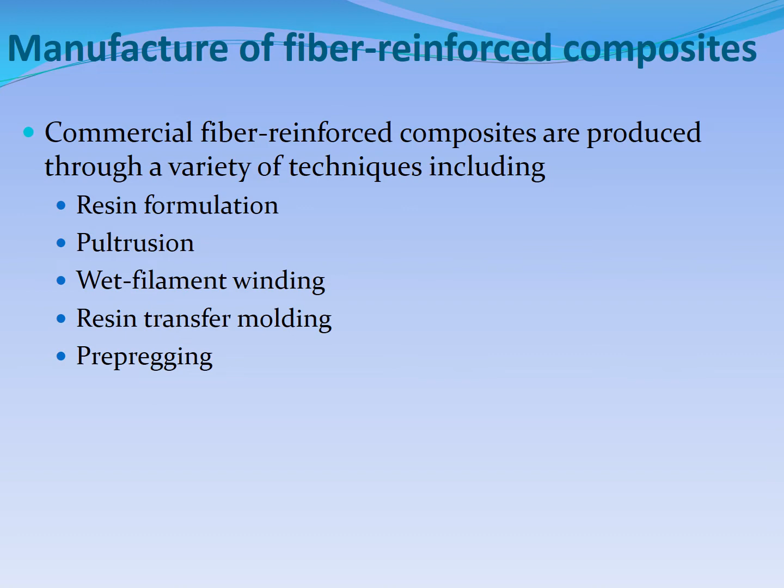Remember, this is a course in advanced materials, right? There is another course in manufacturing, but I keep on trying to show, to a very small extent at least, how these modern materials are manufactured. A little bit. So very quickly,

resin formulation, right? Simplest production strategy: bits of chopped fiber are poured or blown into the matrix material, often already in the desired mold, the shape that we want the final composite to be in. Curing agents, accelerators, dilutants, fillers, and pigments are added as well.

If the matrix is a polymer, then material is melted prior to addition of other ingredients and then poured into the mold. If epoxy resin is the matrix, then it is mixed with a hardener also. The matrix material hardens into the shape of the mold.

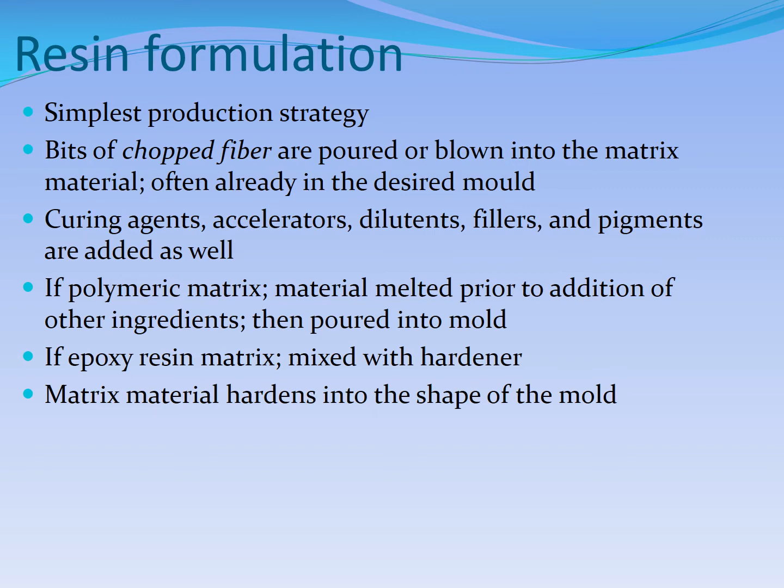Pultrusion. Uniaxial composites are often made through pultrusion. The previous one was chopped. A large number of single strands are wound in parallel to form a roving. Look at this schematic diagram. Many rovings are connected into a device called a creel that lets fibers be pulled together. So this creel is like a spool, right?

Fibers are pulled continuously from the creel through a tensioning device and into a bath where they are coated with a matrix material. So from here to here, and impregnated in a bath. Coated fibers are pulled through a heated die for curing. So after the impregnation in the bath, they are being cured in the die.

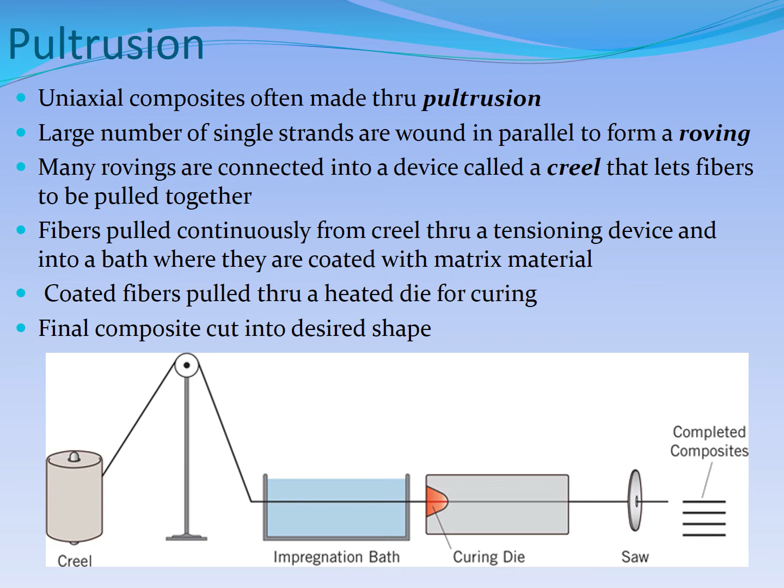And the final composite is cut into the desired shape. So this is like a thread and there is a saw. So completed composites of certain lengths and so on, or they could be wound again and so forth, right? So this is pultrusion. You are making a composite, right? Because in the bath you have the matrix or the resin and so on, and then it is coated and then you are doing it.

So this is pultrusion. Wet filament winding. For more complicated shapes, like if you see weaving is being done. So continuous fibers from rovings are pulled through a resin impregnation bath, then wound into the desired shape. So 1, 2, 3, right? Because they are being impregnated, and then one of them is going in one direction, the other one is going in the other direction, and you are doing a weaving. So this is just a schematic, but the real thing will be pulling it through different directions and a winder.

When enough wet filaments are wound around the part, it is taken into a curing oven to complete a composite of the desired shape, right? So you are doing the same thing as you were doing in pultrusion, but you are doing it from multiple rovings, and then in the end you are winding them in a particular weaving pattern. This weaving pattern could be straight horizontal, straight vertical, diagonally across, or whatever. And once this part is done, then you take the whole thing into the furnace for curing and so on.

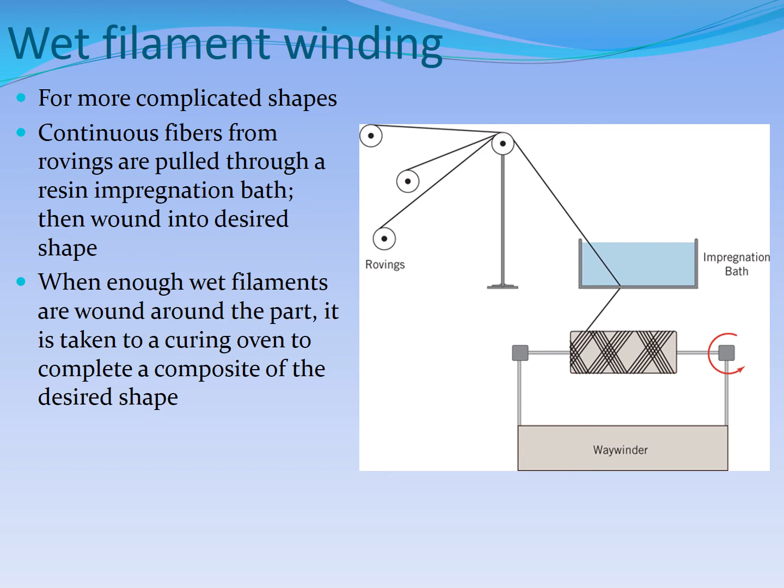Resin transfer molding. Process of converting mats or weaves into composites. You have made some mats, you have made some weaves, and then you are combining them, right? So woven fiber mats are placed into a space between the top and bottom mold. Top mold, bottom mold. Resin is injected through the top cavity under sufficient pressure to ensure that it penetrates and surrounds the mat, right? Injection channel, and this is the mat.

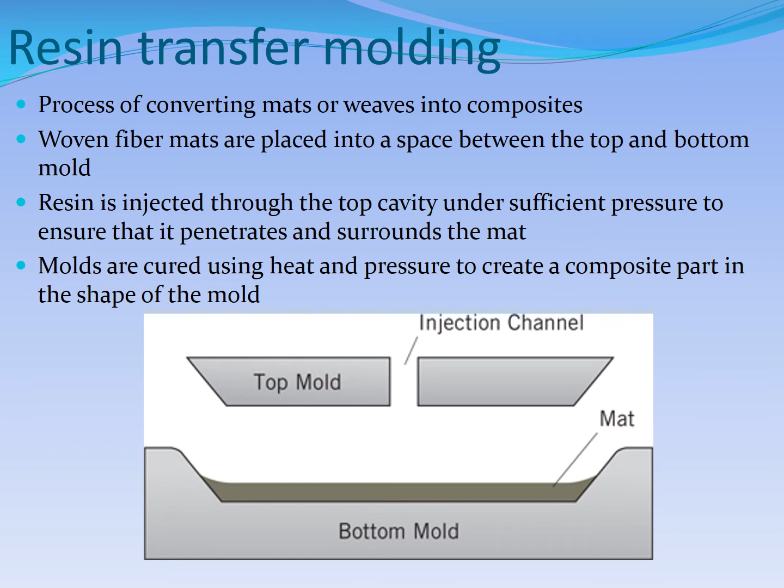Molds are cured using heat and pressure to create a composite part in the shape of the mold. So there is the top mold, there is the bottom mold, there is the injection, and you have the resin in between, and so on. So you have already done the weaving in a standard grid pattern or in a diagonal pattern or whatever, and then you are using those woven mats above and below and so on, and then you are generating any number of plies and so forth.

Pre-pregging. In the previous methods, coating a fiber with matrix was immediately prior to manufacturing the composite part. It can be advantageous to convert fiber bundles already impregnated with matrix material to the composite without further processing. Fibers are passed through an impregnation bath that coats them with small quantities of resin. They are then passed through a furnace and heated slightly to ensure that the resin sticks to the fiber.

The resulting pre-coated fiber, which is called pre-preg, is stored under refrigeration until it is ready to be formed into the composites. Pre-preg is generally woven into the desired mat, trimmed and placed into the mold. Often several layers are required for the desired thickness. The mold is placed in a vacuum bag, then cured in an autoclave and subjected to pressure and heat.

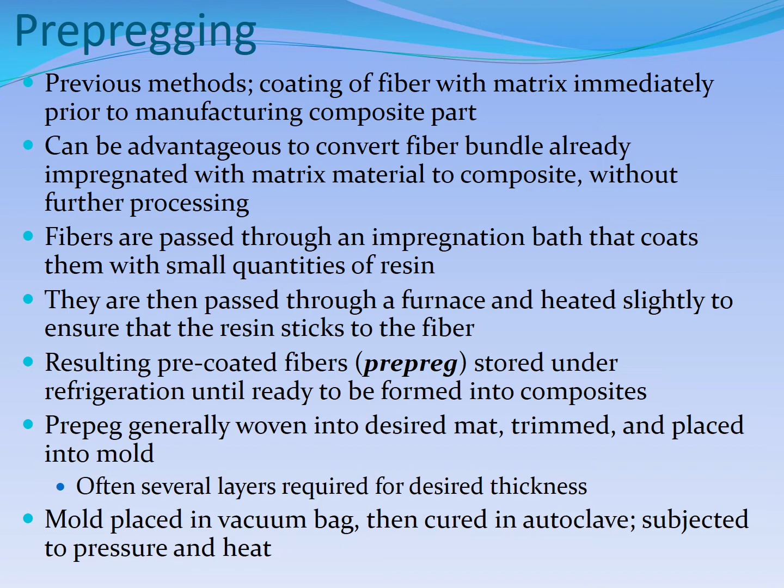So this is a little more advanced combination of the previous methods. Here you are seeing that the fiber spool is there, then they are impregnated in the bath, then they are going into the furnace, then after the furnace, when it is cured, they are doing the pre-pregging, and then the wind-up spool is there in the final one. So this is the pre-pregging process. I am not going into a lot of detail. We are showing this to you only in a schematic manner.

And as I said, unless you join a factory where composites are actually being made, you know just a little. But for example, we have in Sohar CPI, Composite Pipe Industries. There is another composite manufacturing plant in Rusayl. These are big ones, where if you do a job, you will very quickly see that the matrix material is this type of resin or polymer, and the fiber material is this type of glass or carbon, and the way you are doing this winding.

For example, CPI is Composite Pipe Industry. After pre-pregging, they are already winding the whole thing in the shape of a pipe. Maybe it is a 6-meter pipe being made. And once it is woven, the whole pipe will be cured somewhere. So you will actually see it. These are large ones, but small composite factories are there in Mabela.

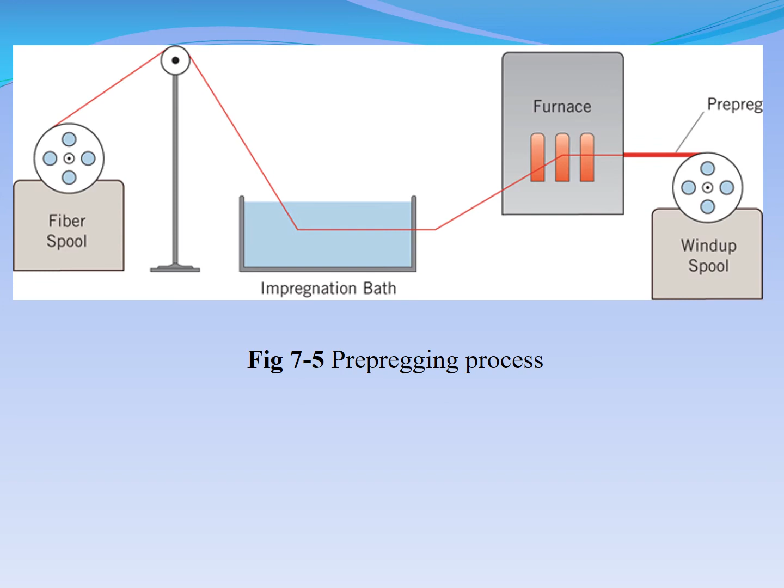Selection of reinforcing fibers. The most important properties to be considered in reinforcing fiber selection are specific strength, cost and the ability to bond with the matrix. Until now, we were using the strength, the density, and the Young's modulus. Specific strength was there in the tables, but we were not using it. Now we are telling you that specific strength is very critical. Specific strength is tensile strength divided by density.

So it is an indicator of the strength to weight ratio, because this is the most important thing, strength to weight ratio. We don't want a very high strength if the total mass or total weight of the composite will be very high. We don't want that. In any engineering, we don't want a very heavy object. So strength to weight ratio is the specific strength. In table 7-2, key properties are there, and a specific strength is also there.

Ceramic fibers, silicon carbide, aluminum oxide, etc., tend to be strong and stiff but dense, right? So their strength is very good, but dense means they will be heavy. Glass fibers offer chemical resistance, right? They are resistant to chemical action. They are high strength and they are low cost, but they are sometimes easily broken during processing, right? So we are just combining that.

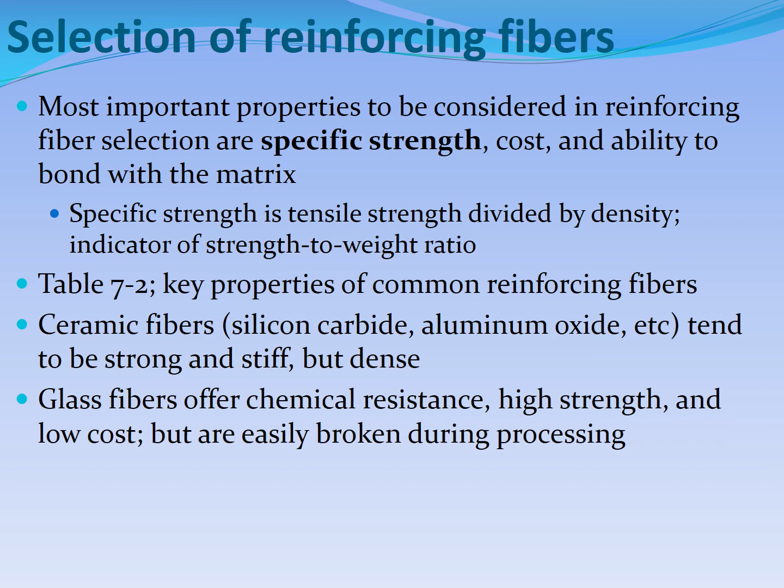That is why you see so many fiberglass things; water tanks are fiberglass, bathroom tubs are fiberglass. Why are they used in so low cost things? Because their cost is low and still they are pretty strong. So the same table once again, but if you see specific strength, if the specific strength is good, this 2.5 is good, right? This 2.8 is good. But what about the density? This 2.5 is good, but very dense, right? So you have to see which is very good, which is not very good, and so on.

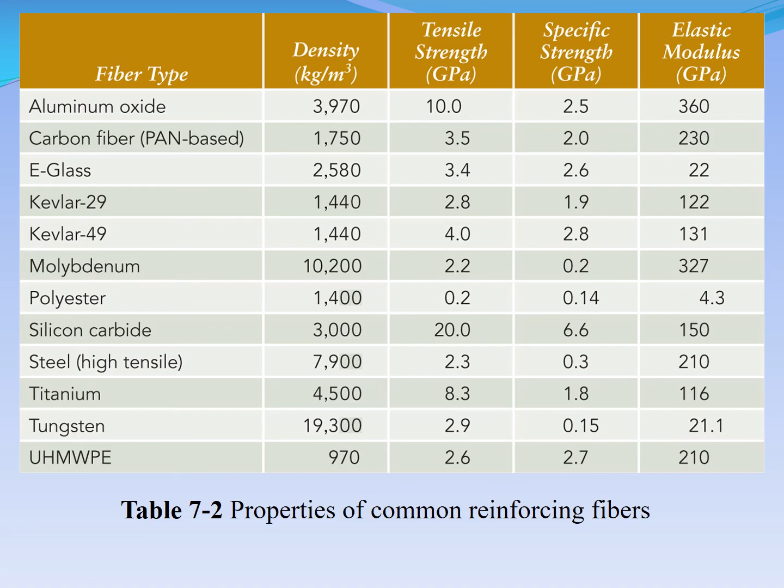Metals are strong, but also heavy. Tungsten and molybdenum are there in space applications and welding applications because they have a very high melting point. Steel is heavy, but good strength and thermal conductivity. Titanium is exceptional specific strength, inert in the human body, capable of osseointegration, we have told you, so forming direct connection with living bone. So they are used as composite, dental and joint replacements and so forth. Sometimes the cost is high, but if it is a human being, you extend the life of the human being.

There are high performance polymers also, which are strong and light, but in terms of compressive forces they are not very good. In Kevlar, bulletproof, we need compressive strength more than the other strength because the bullet is compressing it. So we will not want high performance polymers there. So bullet resistant materials, sports gear, brake linings and so on, Kevlar is very good, but maybe not in some others.

Carbon fibers, if performance overrides the cost. If performance is critical, cost does not matter much, then high specific strength of carbon fibers, elevated temperature resistance of carbon fibers: race car frames, space shuttles, special construction applications, and so on. So different choices.

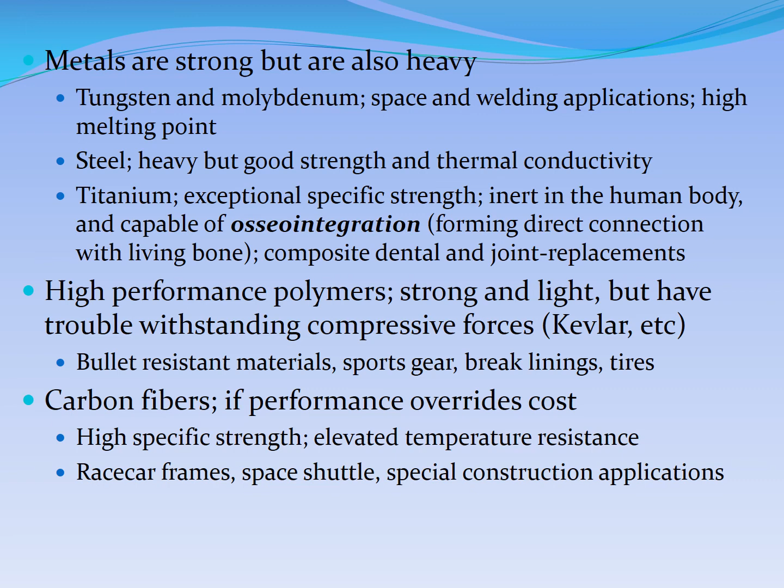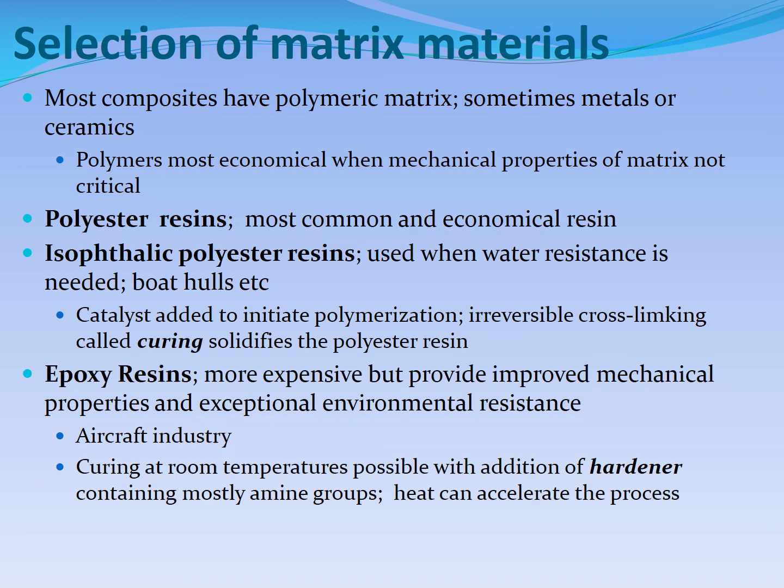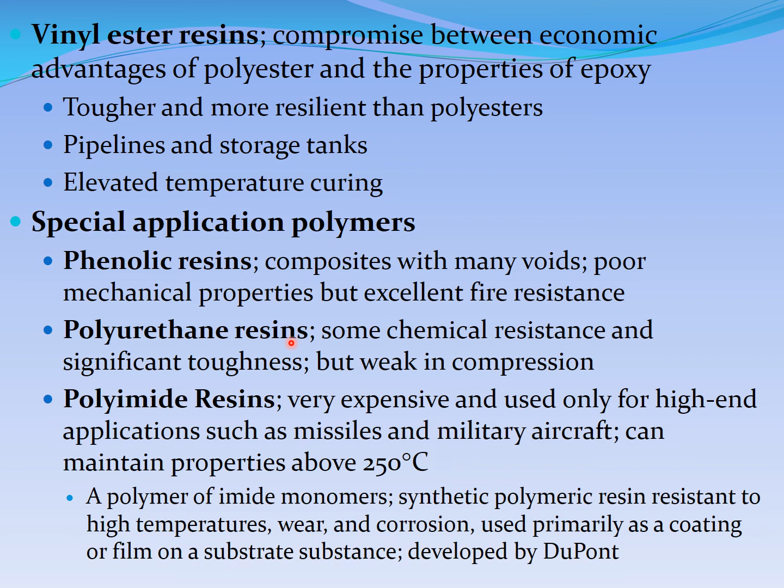Selection of the matrix material. Matrix could be polyester resin, isophthalic polyester resins, epoxy resins. They have different properties. Some hardeners may have to be added in the matrix. So they are polymers, but different choices, and we should see what we want as the matrix, as the polymer. Vinyl ester resins are there, special application polymers, phenolic resins, polyurethane resins, polyimide resins, and so on. They are for specific use.

And then alternative matrix materials, metal matrix composites are also there, which are also very good. Of course, the cost will be very high, but the strength and so on will be very good.

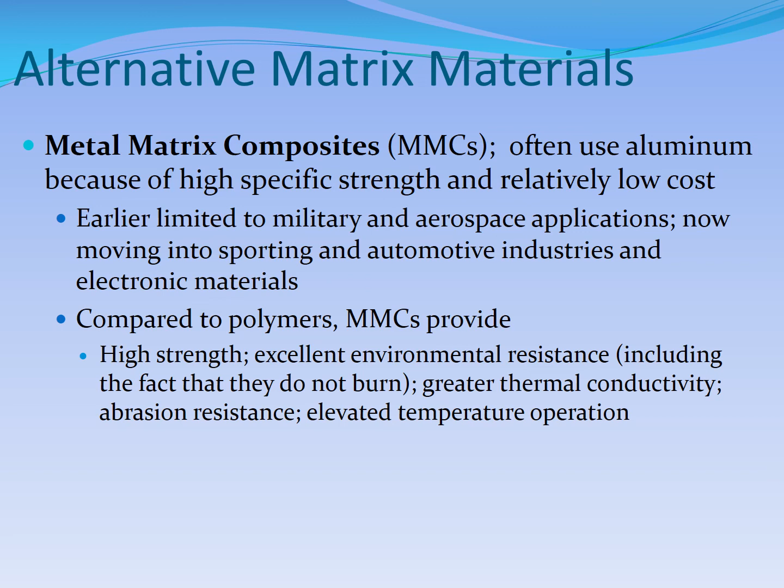So we will stop here. We will stop the whole chapter here. The rest of the slides are there, loaded for you in your slides. Quickly go through them, but we will not hold you to very detailed answers in the rest of the things. But until here, you are responsible.